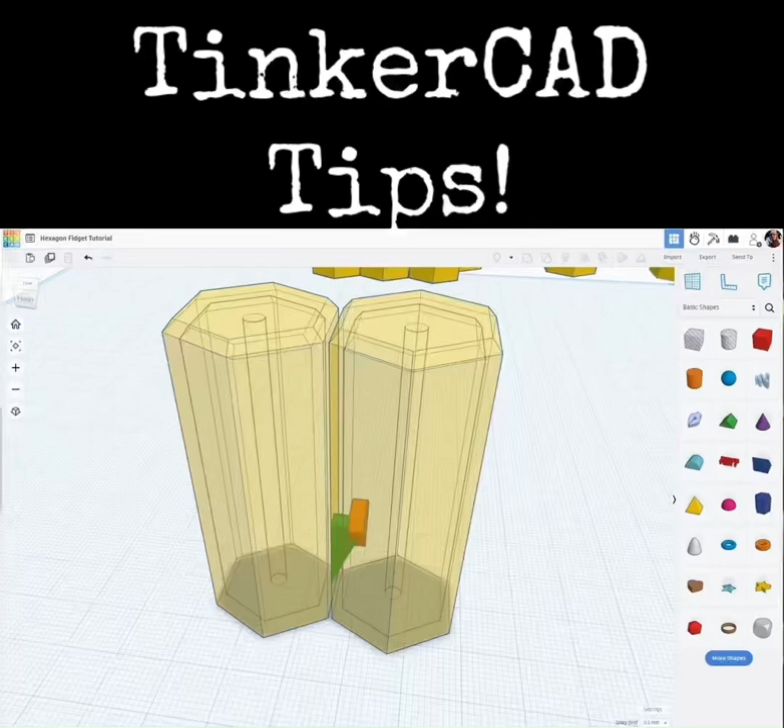Kind of looks like this back here. We had been working on these little ears, these tabs that are going to interlock these hexagonal cells together. So we had started working on it. We have the shape about right. Now we have to clean that up and make it usable.

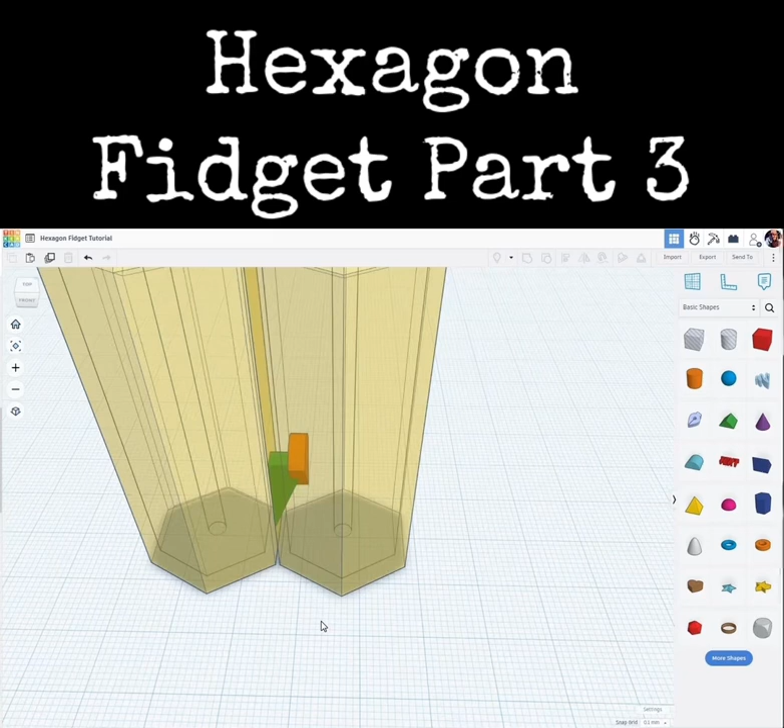I'm going to go ahead and select this one here, and for now I can go ahead and delete that. Alright, so I'm going to grab these two pieces here. We have to do a little bit of cleanup on this. So I want to take this part of this pie shape off of here.

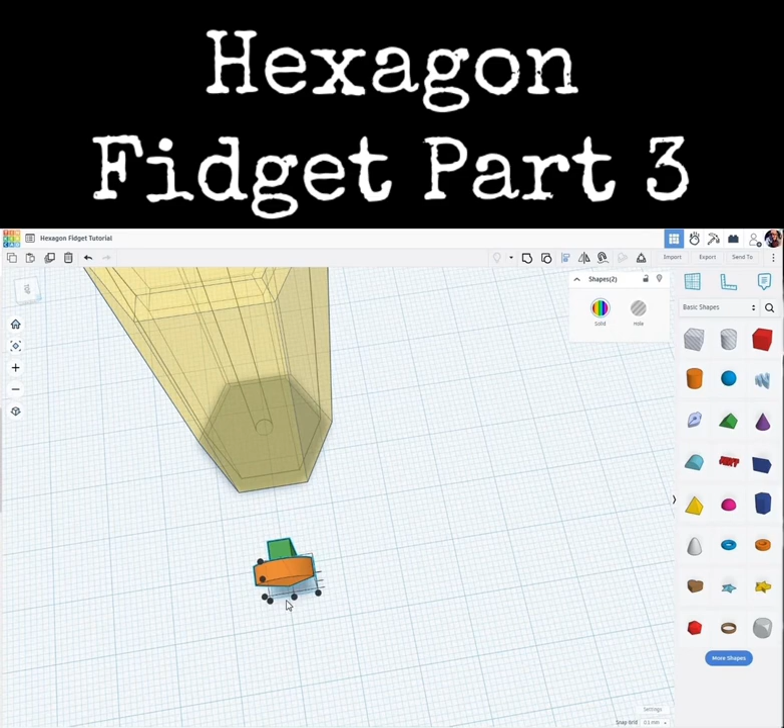But before we do that, let's go ahead and do a quick alignment on these. Let's get them aligned in that direction and also on the edges here. Okay, you can just see the edge of that triangle there.

Let's go ahead and trim this part off, and for that we're going to bring out a hole cube. And while it's in cruise mode, I'm going to lay it on the flat part of that triangle. Right about there. Notice that our work plane now matches the bottom of that hole cube.

I'm going to bring this down a little bit. I'm going to come from the side. We can go ahead and squish this in a bit, that direction, that direction. Okay, that looks pretty good.

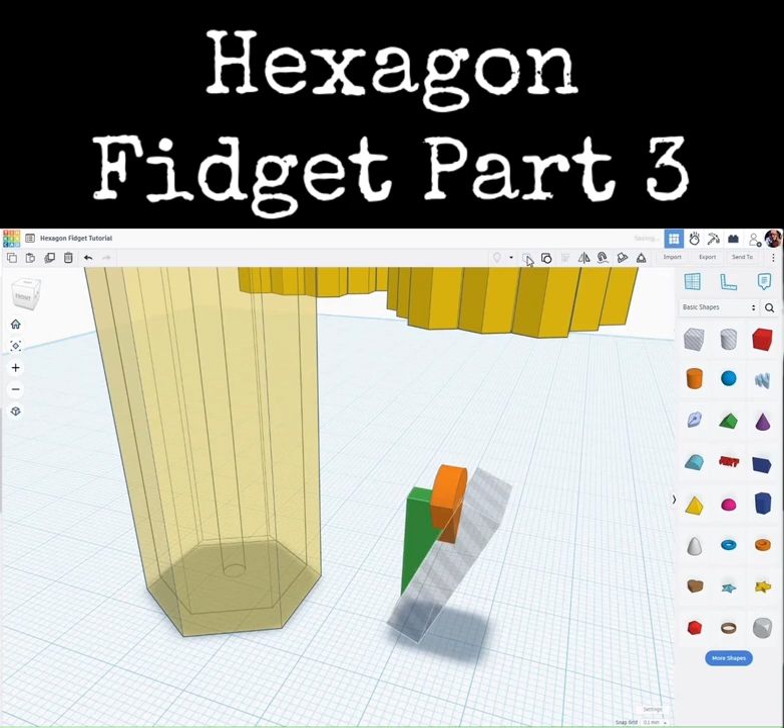Zoom out. I'm going to go ahead and select all three of those, group those together. And notice here, this is one of the new features. Now that I group those together, it used to be that they would turn the color of whichever object you had selected for grouping first. Now it automatically goes into this multicolor mode.

So, moving forward, we now need to make copies of this here, and because there's a curved surface on here, to make things a little bit quicker, I'm going to go ahead and select this object and export it as an STL and bring it back in.

So I'm going to export STL, save file. It's going to go to my STL folders. It's just going to be called Hexagon Fidget Tutorial. I'm going to click Save. I'm going to click on Import, and we're going to bring that back in again. There's my part. Click Open, Import.

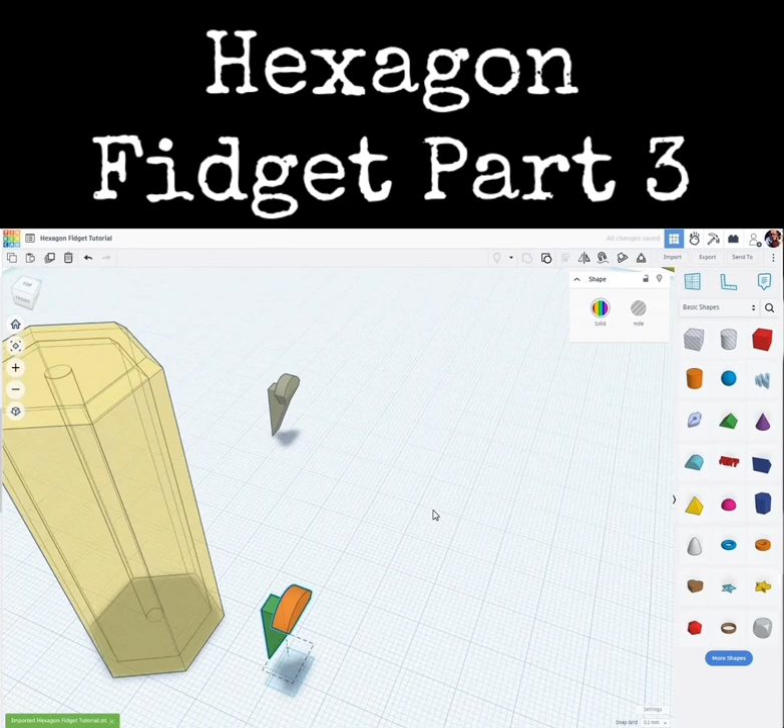And once it's imported, it'll look like this, one solid piece. We can go ahead and click on this one now and delete that one. We won't need that one anymore. Let's take our new part here. Let's make it yellow, just so that it's easier to see.

There we go. Now we're going to be placing three of these around the circumference of this hexagon. Let me show you how we're going to do that. For now, let's click this hexagon. I'm going to hit T to make it non-transparent again.

So first thing I want to do is I want to drop this flush onto the side of the hexagon. For that, I'm going to take the work plane tool. I can click up here or hit the letter W. We're going to put it on the side of the hexagon with that arrow facing out.

I'm going to select my part here. I'm going to drop it. There we go. I'm going to hit W and put the work plane back on the default.

Let's do some alignment here. Just select the two of those, click Align. I'm going to click on the hexagon to keep it stationary where it's at. I'm going to click that direction. There we have it. So now it's pretty much flat on top of there.

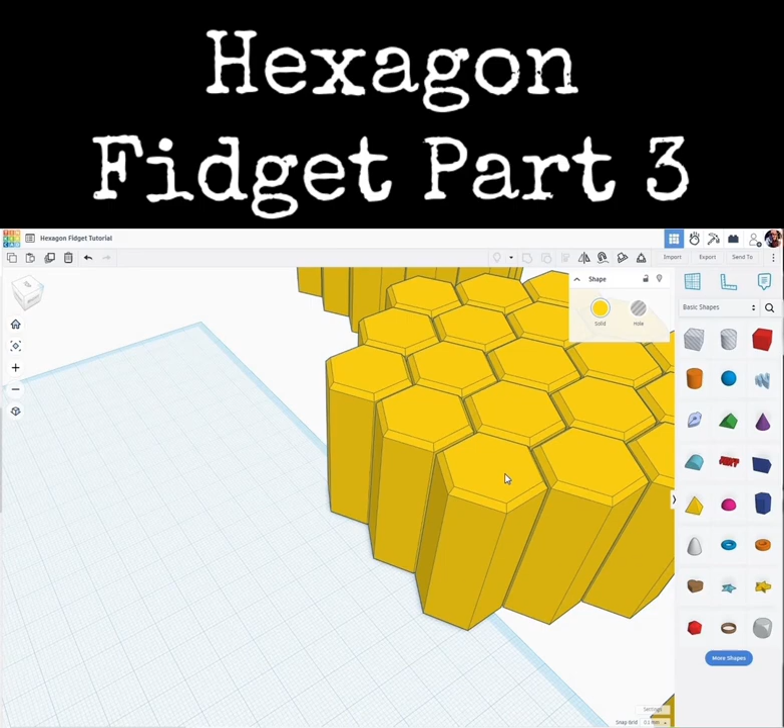It's at the very bottom here. Let's go ahead and bring this up. If you look at our original design here, what we're going after, if I make all of this transparent, you can see those ears, those tabs are about halfway up.

So we're going to come back out here. We're going to click on that tab and simply drag it up to where that tab is about halfway. Doesn't need to be exact, but you can make it exact if you want.

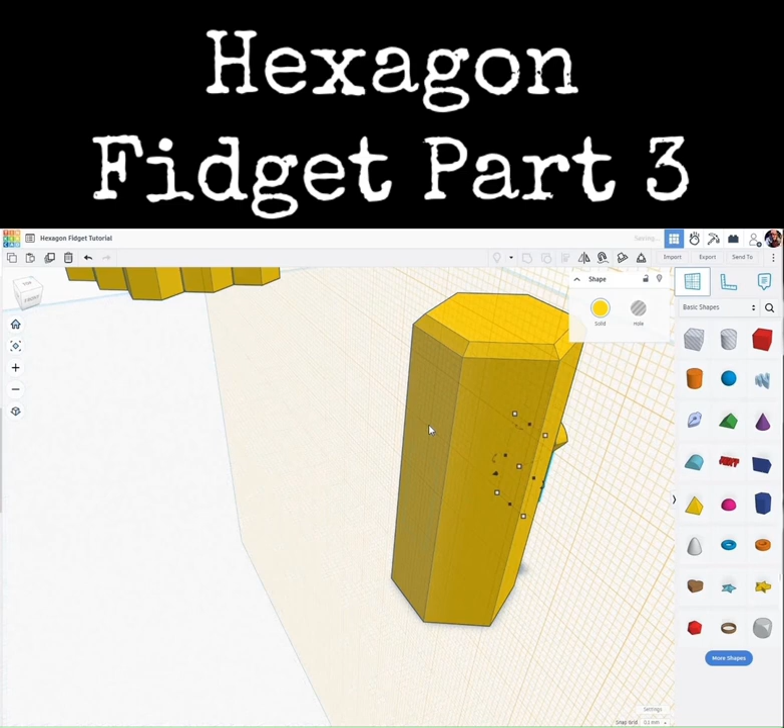Now, in order to get these equidistant around here, I'm going to select that tab, click Duplicate, click on the mirroring tool, and mirror it in the opposite direction. I'm going to come around to this side of the hexagon, hit W for work plane, and put it on the side. I'll hit D to drop it to that work plane, then W to put the work plane back.

Now I have the two of those, and we'll be deleting one of these here in a moment, but this is going to help get them equidistant around this hexagon. So I'm going to select both of those, click Duplicate, come over here to the turn tool, click on that, type in 60 degrees and hit enter. Now while those are still selected, I'm going to hit Control D to duplicate one more time. So now if we look around, we have 6 of those on there.

Now I want to get rid of 3 of them. Here's our original one, the one we want to keep. I'm going to click on this one and delete it, that one and delete it, and that one and delete it. All right, that's what we have so far.

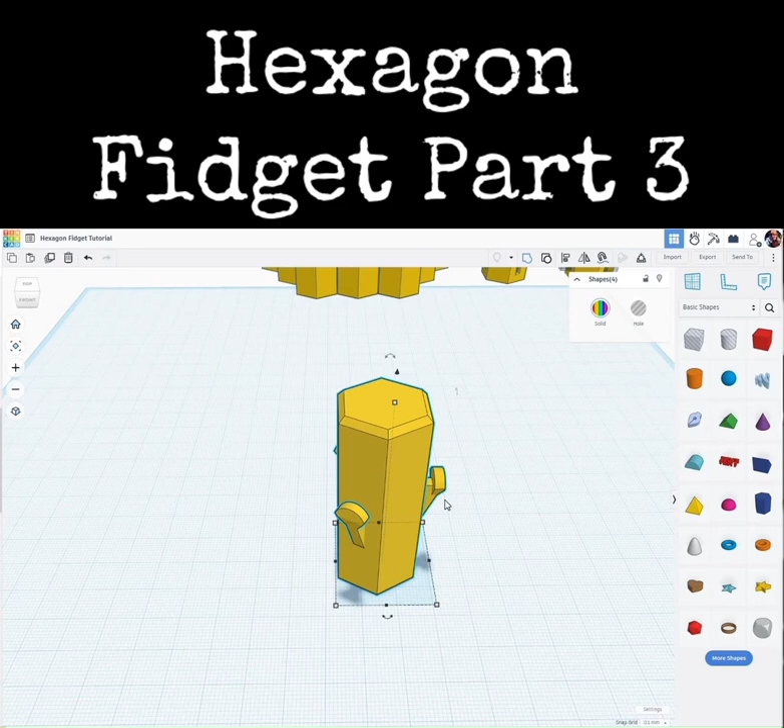Okay, let's go ahead and group all of that together. And if I make it transparent, you can still see that it's hollow on the inside with these little ears poking out. Now let's do the slots. Very easy to do these.

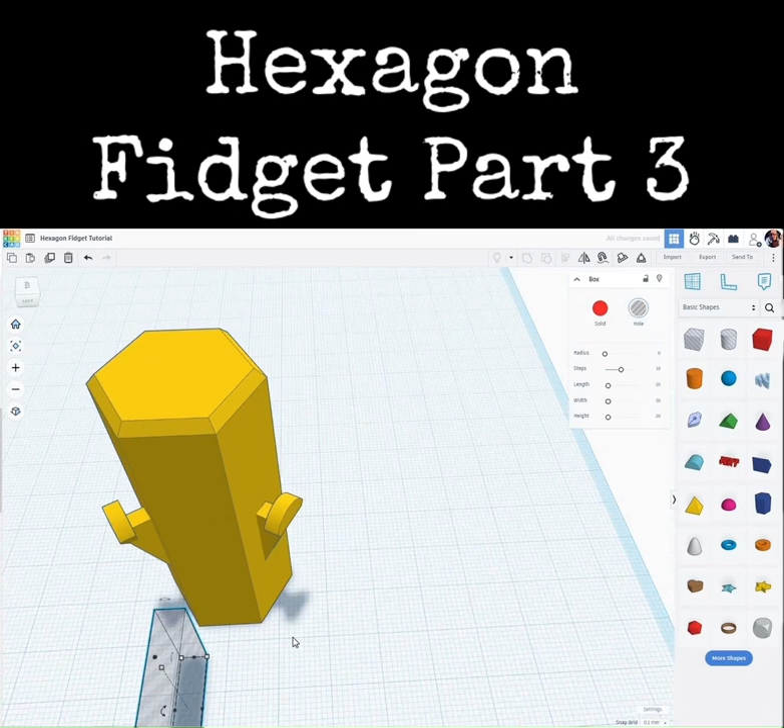For this, we're going to work on this side, the one opposite that first ear. We're going to bring out a hole box. I'm going to make this, in this case, 5 millimeters wide. Remember, these tabs here across the middle were like 3 millimeters, so we want to have some tolerance, some clearance here. Going to make that 5 millimeters.

Zoom out, move around, we can bring this in a little bit. All right, let's go ahead and center it with that hexagon. We're going to do align, click on the hexagon to keep it stationary, and I'm going to center it down the middle.

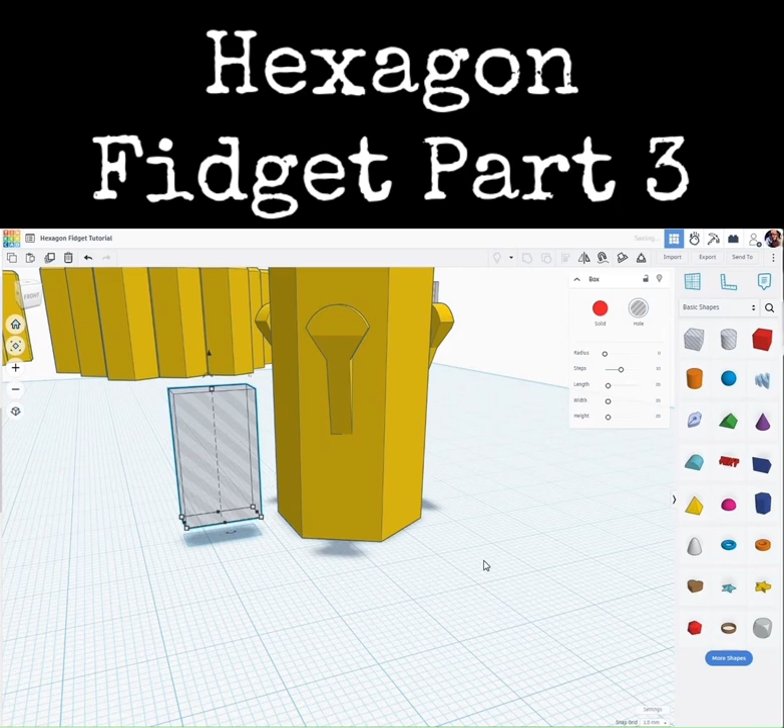Now we want this slot to start about 3 millimeters off the bottom of this. So while that's selected, I'm going to change my snap grid to 1 millimeter. Holding down Control, I'm going to cursor up 1, 2, 3. Okay, I'm going to come to the side here and shift nudge that into the body of the hexagon. Then I'm going to grab the top sizing handle and bring it up to right about there. Again, doesn't need to be exact, but near the top.

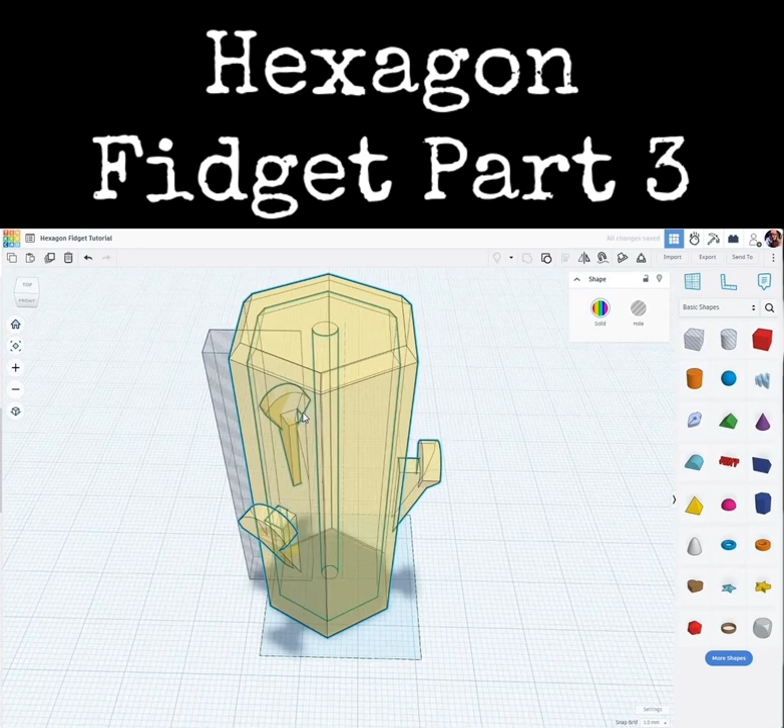If we make this transparent, you can see it poking through on the inside. Okay, now we need to do the same thing, make a duplicate of that and make the other 5. So I'm going to duplicate this and nudge this over to this side.

Now to get these aligned correctly, I'm going to shift select the other one there, and temporarily group them together. Shift select the hexagon, I'm going to do an alignment. Click on that hexagon, we want to keep it stationary, and I'm going to click that middle alignment button. Whoops, we have to undo that.

We have to not have those tabs as part of this. We'll do a quick ungroup - that won't hurt anything, we can regroup. All right, we're going to select the hexagon, the hole shapes, align to the hexagon. There we go. I'm going to click on those boxes, the hole boxes again.

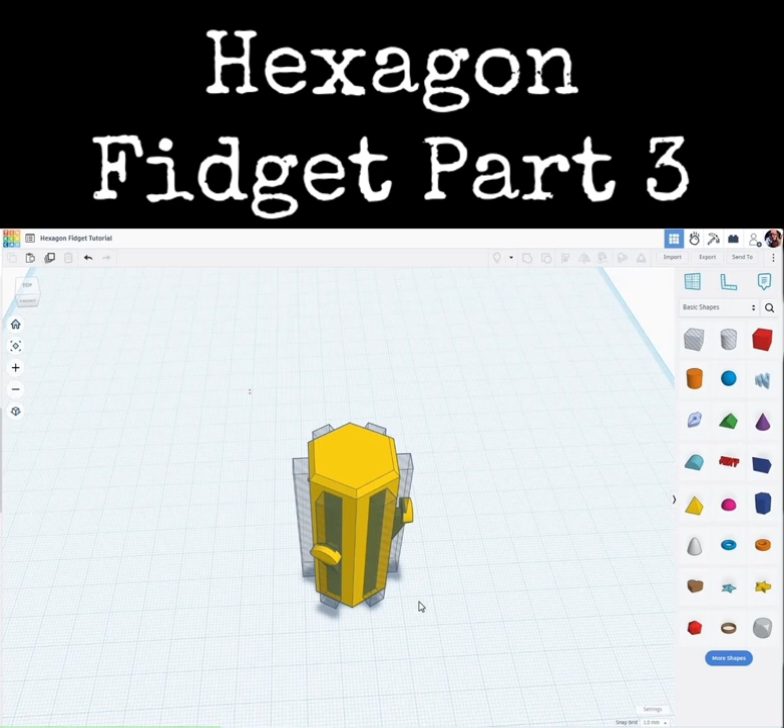I'm going to ungroup. While they're selected, I'm going to click Duplicate. Click over here, 60 degrees, and once more. There we go. Going to select all of these and group them together.

Whoops, we have to delete some. Let's undo that. Let's get rid of that one, and this one over here. There we go. Group those together, and we have our completed part.